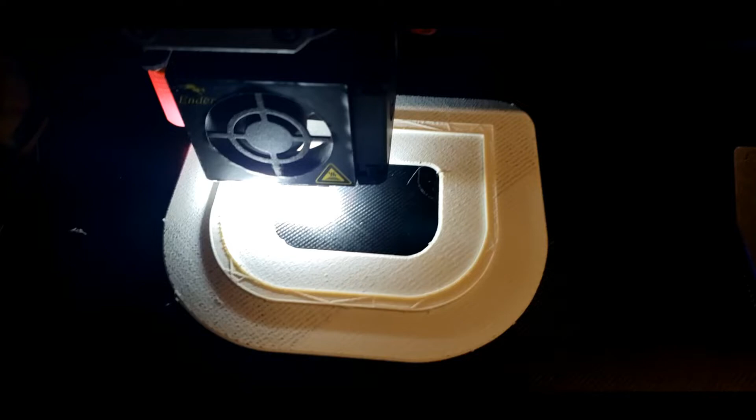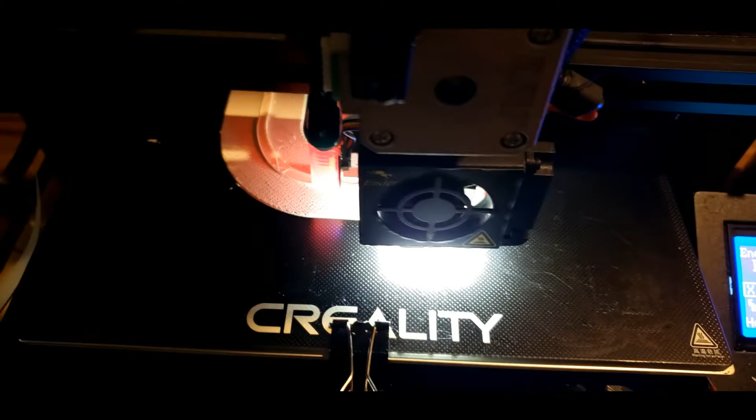Well, I have no idea if I'm doing this correctly. The raft is what I suspected, just underneath what it needs to be, but boy, this is printing like a quarter of an inch wide, which I think would be great for gluing stuff together.

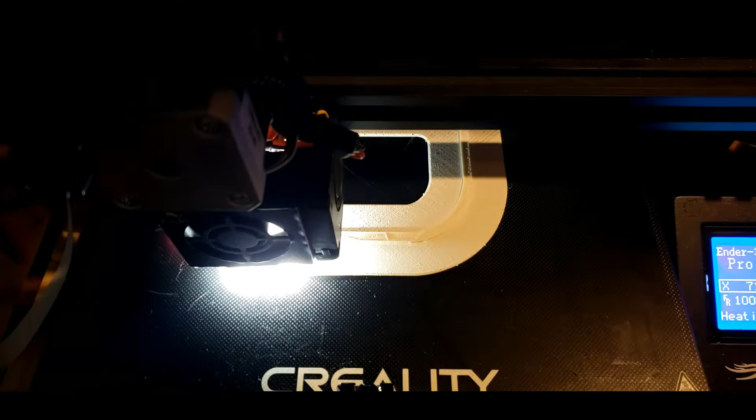But how would it print in a different orientation? Am I even doing this right at all? Well, this has just gotten started, so I won't know a single thing for hours. I'm going to go about my other stuff, leave it alone, and see what it creates.

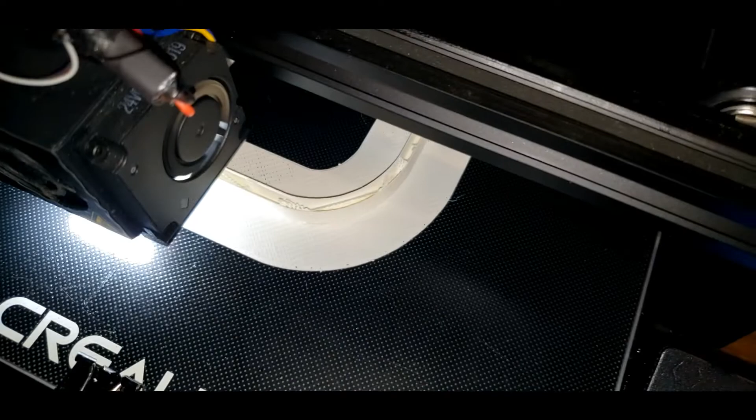Boy, that infill's getting awful deep. I'm getting worried that I'm not building it in the proper orientation, and I'm just going to have an unusable piece. It's just like walls or something.

I may try to print it in another orientation and see what I produce. And then I'm sure I'll be asking the designer questions and have something to show them that illustrates what's going on. This is just my first attempt.

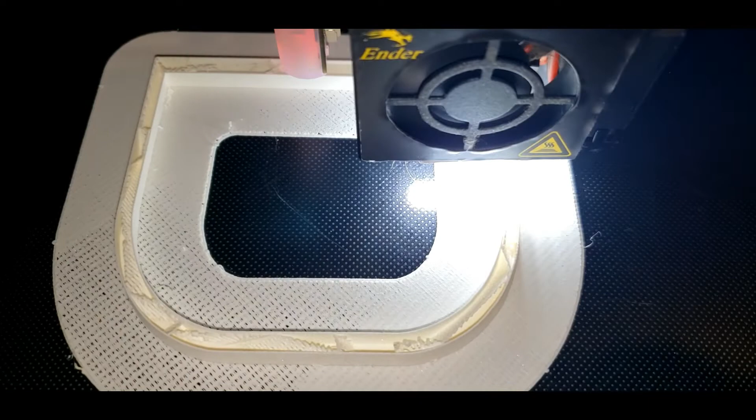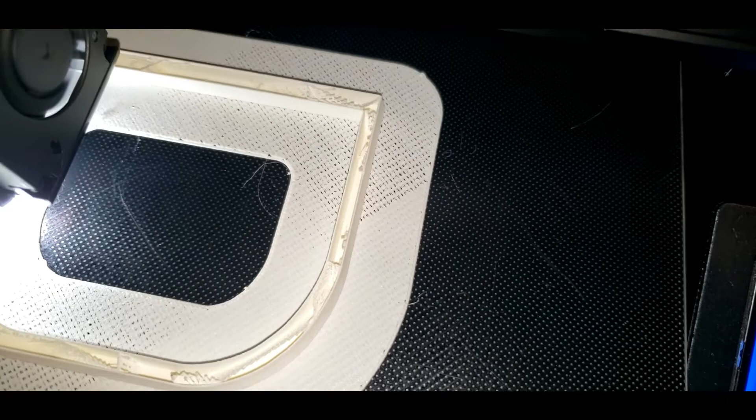So, like I say, I'm a little worried. It's like it's going to be hollow. Maybe everything's supposed to be built in the orientation that it is when you download them. I don't know. I'm just getting worried. I'll shut up.

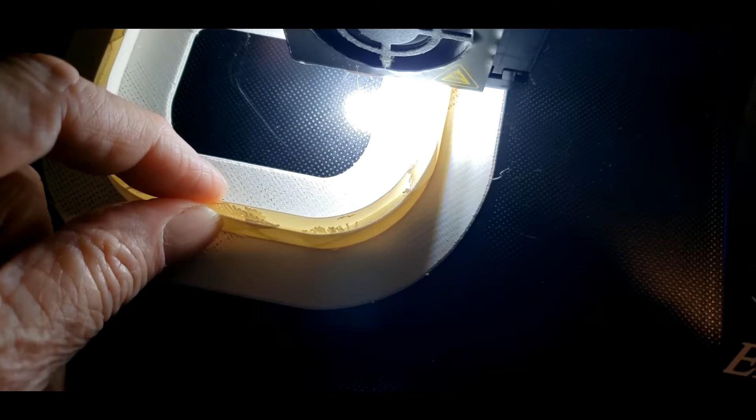It's the strangest filament I've seen yet. It's like paper. Of course, I'm printing it single wall, that's the infill in the middle. But this filament is like paper. It's unbelievable. I don't know how deep the hole is going to get between those two walls.

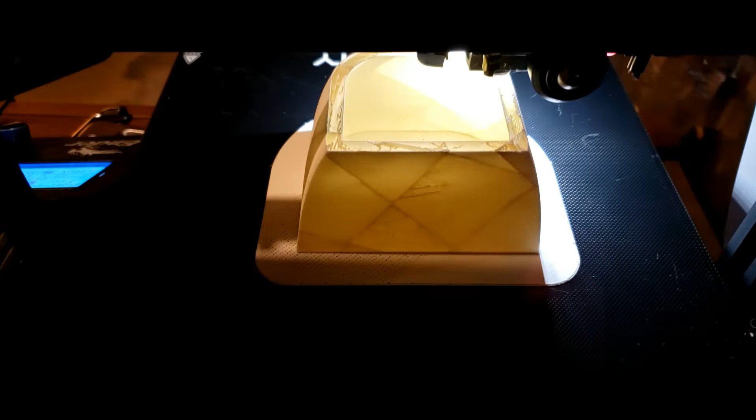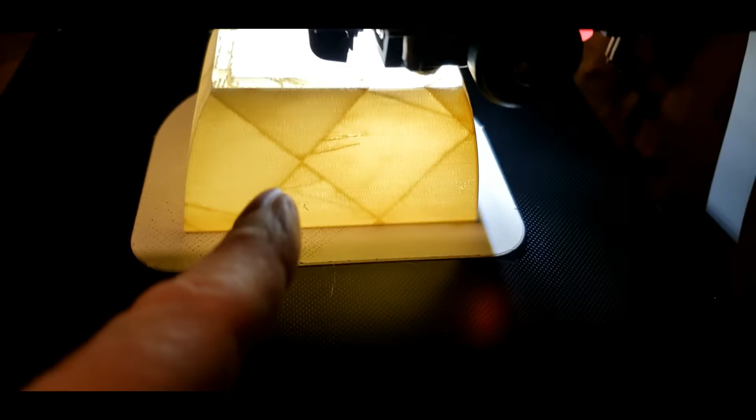Can't take a good picture of it either. It's still printing. It might not finish before I go to bed, but in my opinion, when it's going to try—I looked at Cura, and it's going to try to come up, and as the kind of dome here closes...

It's going to try to print a dome and then print this infill across it and then come back over the top of it with another dome. I'll try to show that in Cura tomorrow. I don't think it's going to successfully do that without support, but I don't know that for sure. It's all theory at this point for me.

So I'm going to try to let it print and see when it fails. I just don't want to have a failed print after I go to bed. These printers can catch on fire. So, really interesting though.

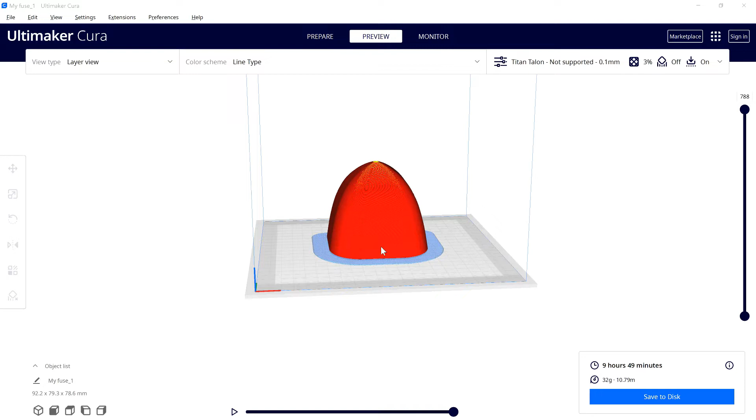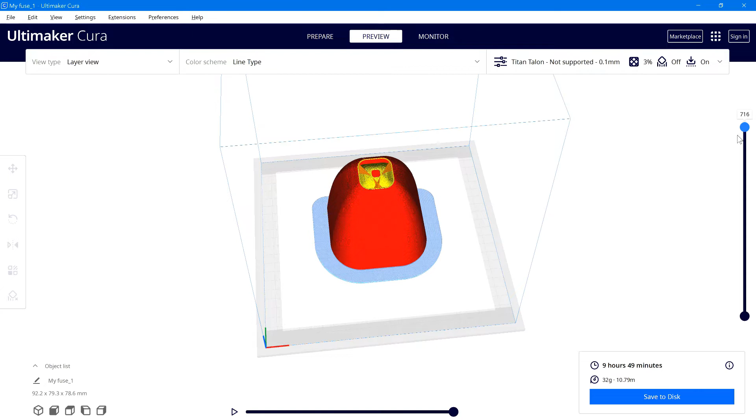And this is what I'm talking about on that print as it comes up to the point here. Let's pull down some layers. You can see right there as the top layer, which is one dome, comes apart, you're actually going to start seeing infill. The yellow lines are infill, and right there starts that little red part right in the middle — that starts the dome that's below that infill on the inside coming apart, opening up.

See, now it would be a hole. I don't think I can rack up that much. Yep, see, now it's a hole, but you can see infill here and here that supports the second dome. Once this one closes — and my worry is about this one closing at the moment.

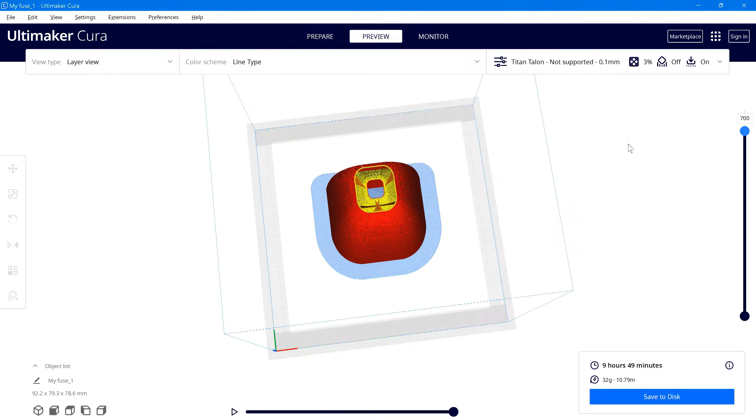See if I come up one layer at a time. You can see that right there. That's what I'm worried about. And that obviously is a hole, but then the next layer decks over it. So that's what I'm worrying about.

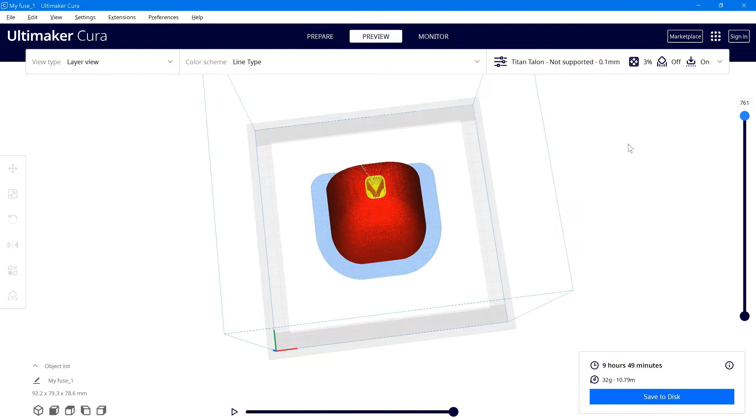And then it comes on up. The infill — see, that infill on that inner dome will support that second dome that's closing right now. So that's what I was worried about.

Now then, on this particular model we're looking at, I have all the perimeters set the way I think they should be: one wall. The infill is using that cubic subdivision at 3%. It didn't tell me anything about what this should be set to, but I left it at the default.

Let's see, the material is 200 and 60 on the bed. Speed, again, I chose 40 just to slow it down a little bit. I want it to print well. Cooling is 100% on.

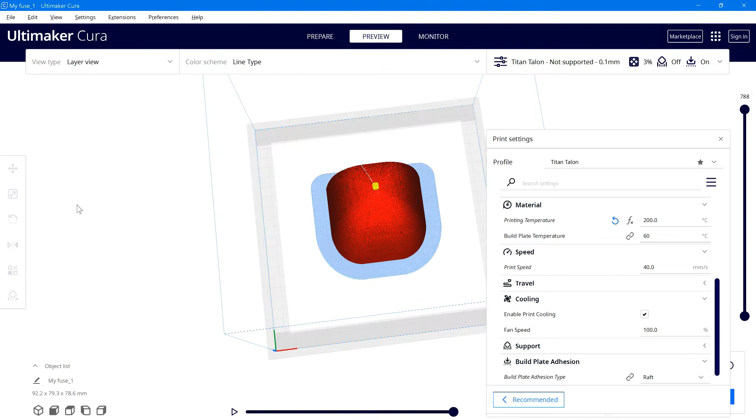And I am printing it on a raft simply because I want to have all the first few layer problems out. So that's the way this is, and I will print this one this way. But now let's just take a little bit of a look at that infill with that cubic subdivision.

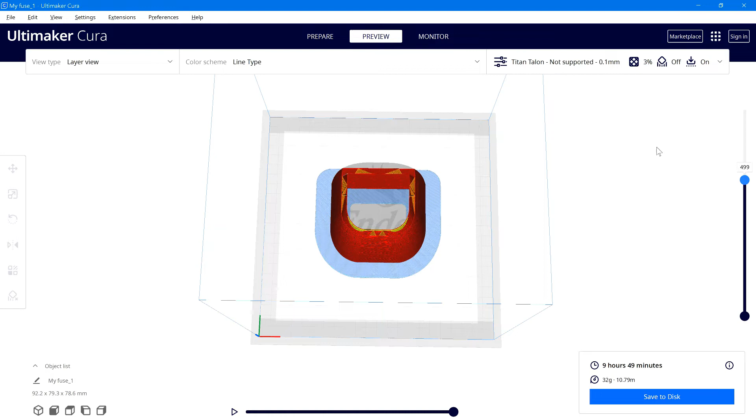I can't tell that much about it as I scroll down through it. It looks somewhat like the other, but I'm going to use what I'm told to use. You can't start troubleshooting until you have attempted to build it exactly like the maker tells you to.

If there's a failure, then you have to decide, was it my failure? Was I unable to follow their instructions? Once you have those decisions made, then you can start deciding, well, maybe if I did this, I can make it better. I think that comes kind of further down the line.

Oh, by the way, it looks like the new Cura does. Here's the raft, and here's that hole in the center of that raft that just kind of got me by surprise the other day. And we've got 1, 2, 3. Wow. And that does come in kind of funky like that on that raft.

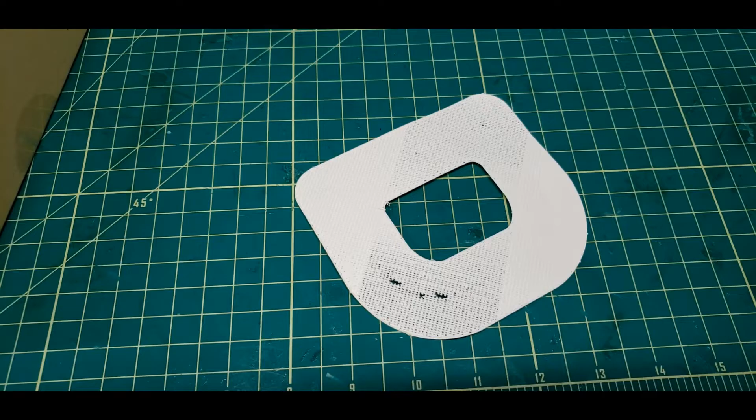If this is the only thing, or this colored here is the only thing they're printing at this level. Wow, see what I mean? Right down through there and right down through there are those 3 divisions that are somewhat different.

These problems here are when I took the build off this raft, some of the plastic broke. But you can actually see, I wondered what was going on when I saw this when it was building the raft. But it's right there in Cura. Oh man, weird.

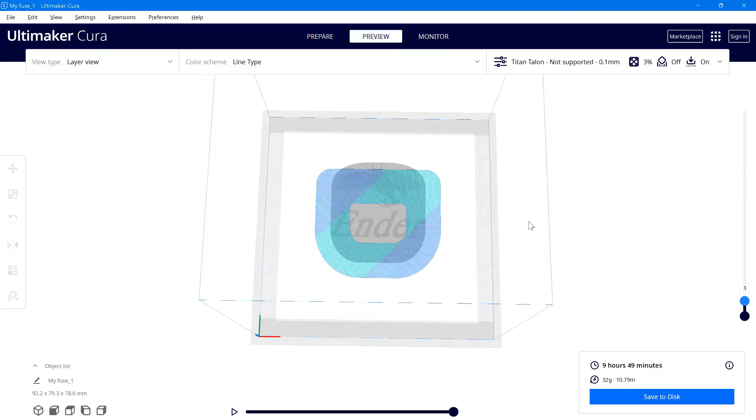And there's 4, so we got 4 layers for the raft, yeah, 4 layers for the raft to get out some imperfections, and then the 5th layer starts the print itself. And that print does print like that solid for 1, looks like 2, 3, 4, 5, 6. I think that's what I've got, yep, 6 layers for the bottom is what I've got set.

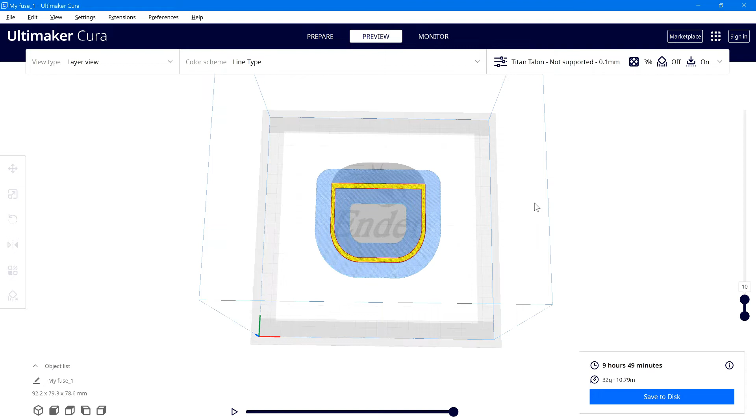That would be top bottom here. That's the defaults, so your bottom layers is 6 for 0.6 millimeters. That seems to be coming out well, and that is the default. And then on the next layer up, which is number 11 technically, you can see the infill starts.

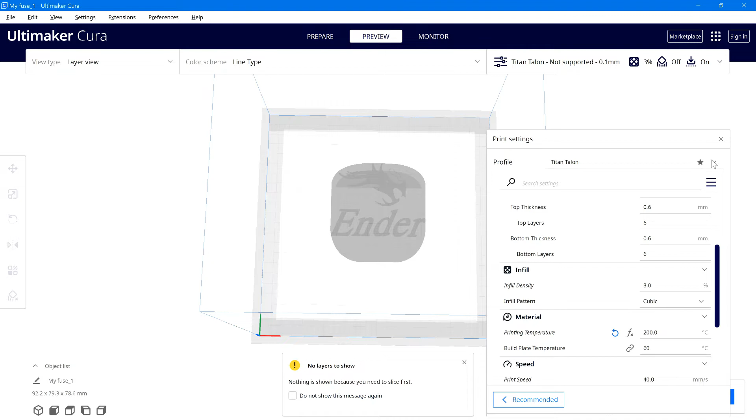Let me look at that infill. If I go in and change this cubic subdivision to just straight cubic, which I had it on the other print, I was hoping it was just going to change what I saw, but it's not. I would have to reslice it and everything, and get back up to layer 11. And by the time all that happens, I can't remember where those marks were.

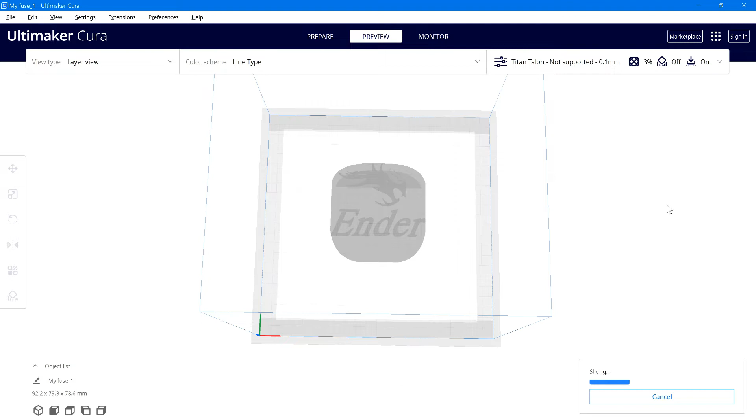Oh, I guess it did stay where I had it. So those infills right there do look different. Layer 13 looks different than these infill marks. And I think, yep, 13, yep, they do look different.

Yeah, so I'm going to print it again today. It's going to take about 10 hours, and I think that will be my final printing. I will set that aside and continue printing other things.

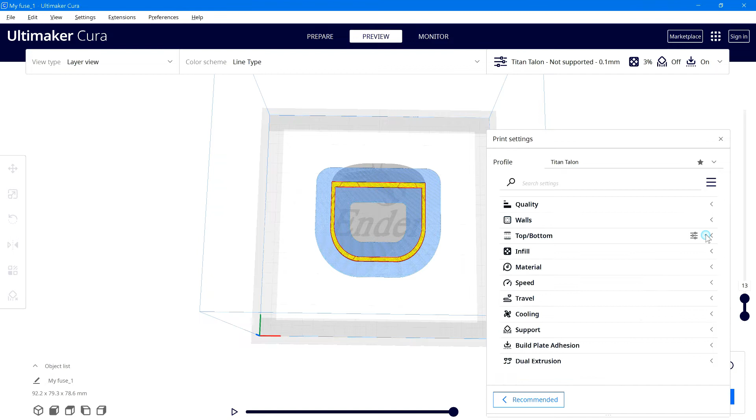I'm really having fun with this, and I'm also learning more about Cura. That's usually the way I learn. I don't sit down and learn something just for kicks and grins usually. I usually learn it on the fly, on the run, whatever you want to call it, while I'm doing a project. Yeah, probably would be a little easier on myself if I just sat down and did an overall Cura tutorial sometime. But really, the way I do things is I will leave one project with what Cura knowledge I have and go into the next project and pick up maybe 2 or 3 other little things.

I've already had the printer 2 years. I already learned G-code and modifying G-code directly. I don't think that's hard for a programmer. After I got out of the Navy and did all that hardware and electronics work, I used my GI Bill when I went to college to become a programmer.

I did know assembly language and stuff like that because you have to program machine language, whatever you want to call it. I call it assembly or machine language. You have to when you design a computer circuit. You're the one that designs that repertoire technically at first, and you have to work in machine language on those circuits.

You can't work in any language above that, really. Nowadays you can, but back then you didn't. So I had the hardest programming language on the face of the planet, which was machine language or a repertoire of instructions for a processor chip, down before I got out of the Navy.

When I went to college, I took Fortran, COBOL. Those were the only programming languages when I was in college. C++, HTML was 20, 30 years away, Perl and all that. But I learned BASIC on my own playing with a Radio Shack tabletop computer.

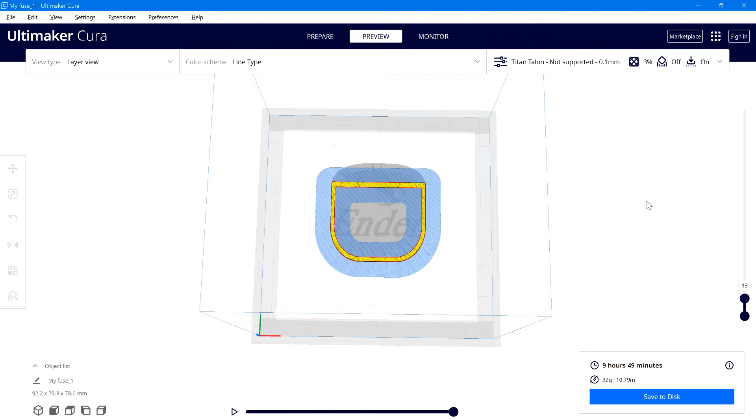All right, let's move along here. And my little printer seems to be printing it pretty darn well.

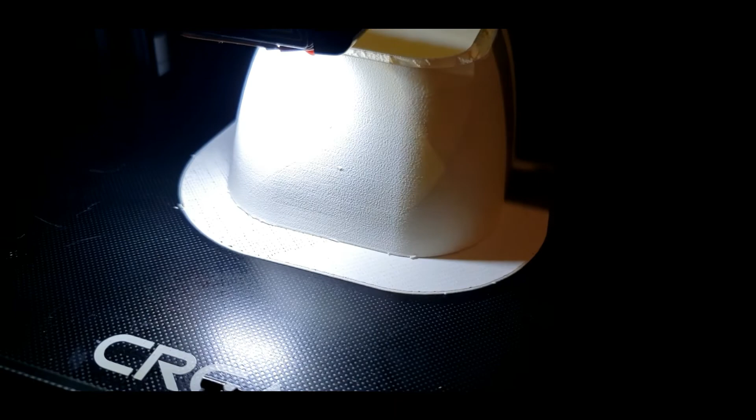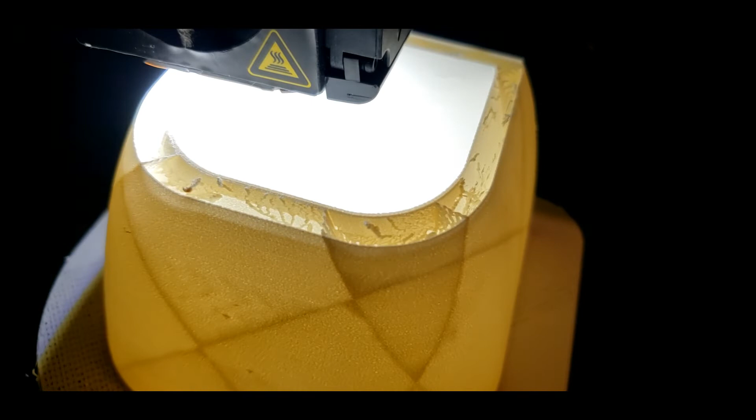Just such a unique thing to print. The head keeps getting in the way. So don't go to bed for a couple of hours.

Well, it just keeps getting smaller and smaller on that inner dome. I just can't believe the last little bit of that is flat. It can't just float in midair. We'll see what happens here. Crazy, it's supposed to print for 3 more hours.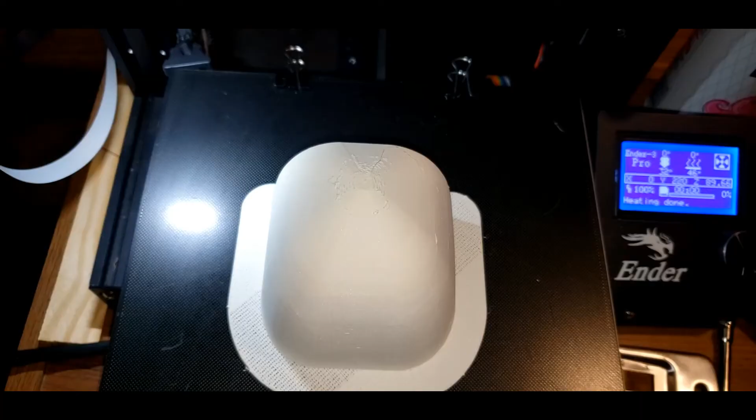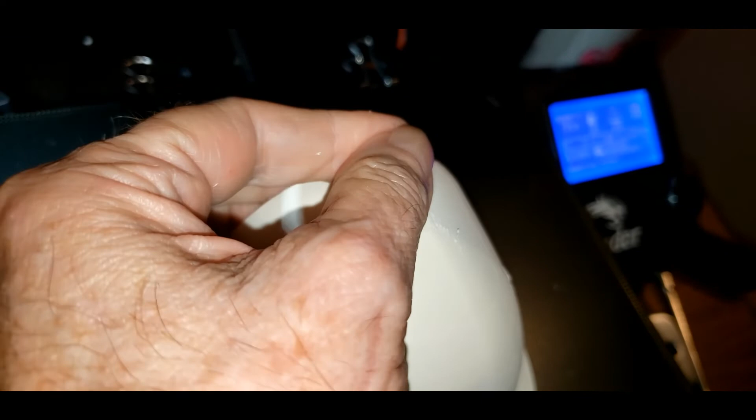Well, it's sort of printed. Got some roughness up here. Not quite sure what it is. Have to get it over in the light. But overall, I would say that's pretty darn good. Don't know if this can be sanded.

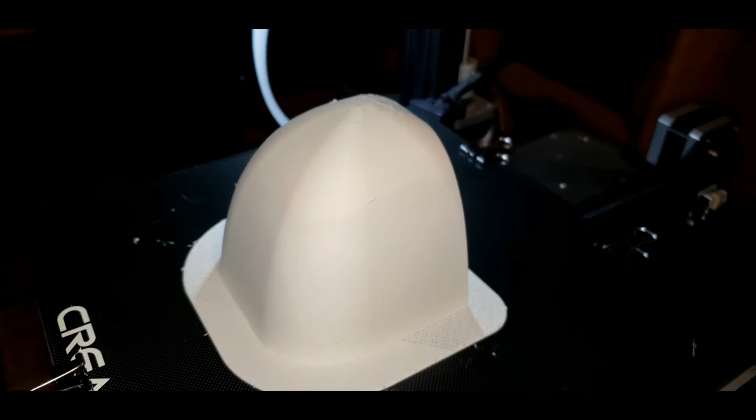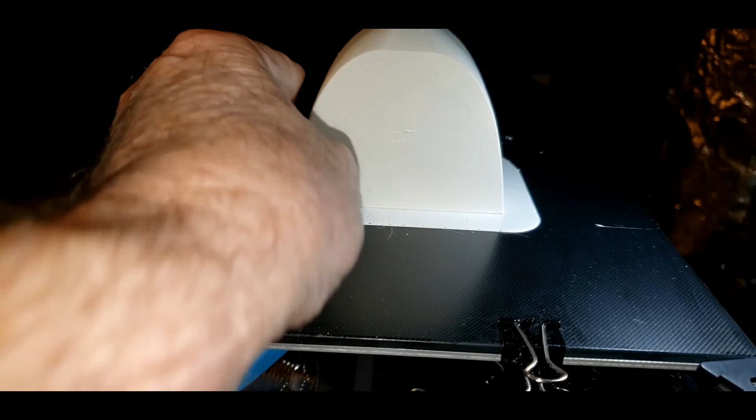It is the top of a mini Talon. Oops. Boy, that feels pretty solid.

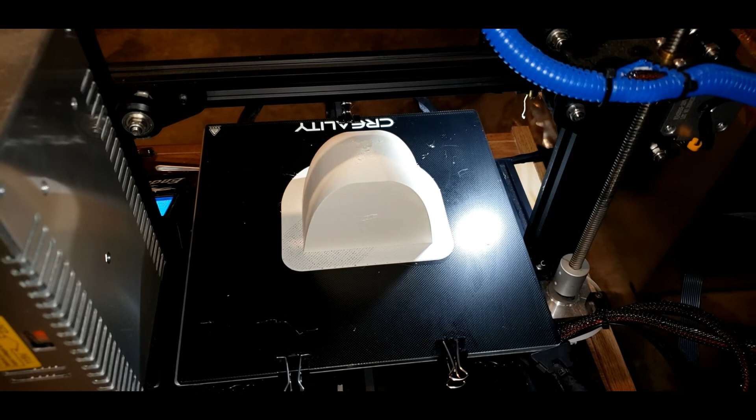I'm going to let it cool a bit more. It'll come off the build surface much easier. I'll probably do something with it tomorrow.

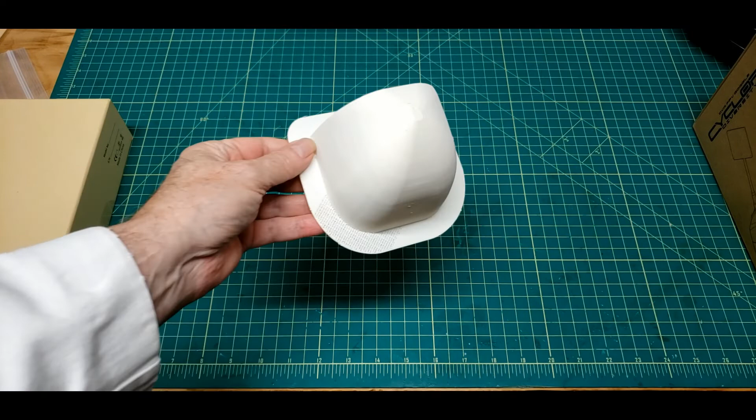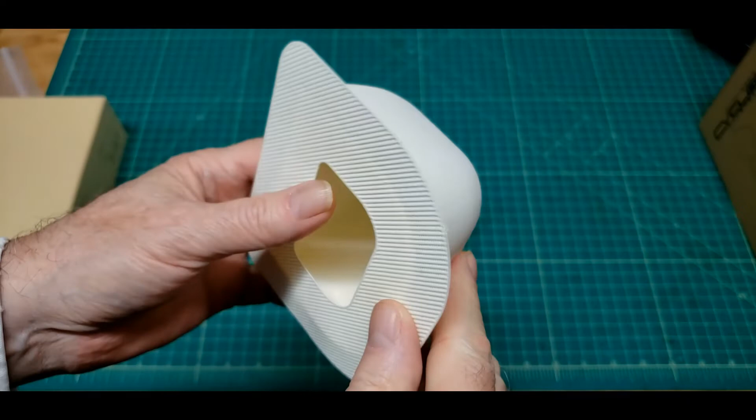Well, it finished printing last night. I haven't taken the raft off of it yet. It's pretty unusual, it did complete without failing. It's amazing, and it feels like paper.

It's wild. Like I say, I saw Josh Bixler show this filament PLA months ago. I just never had an opportunity to test it. So we'll take the raft off now.

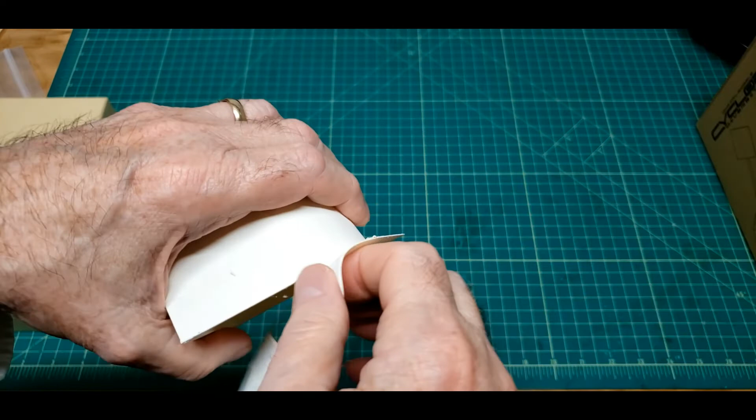Wow. Oops. Doesn't want to come loose there. A little cleanup to do right there. Not much, we'll do that later.

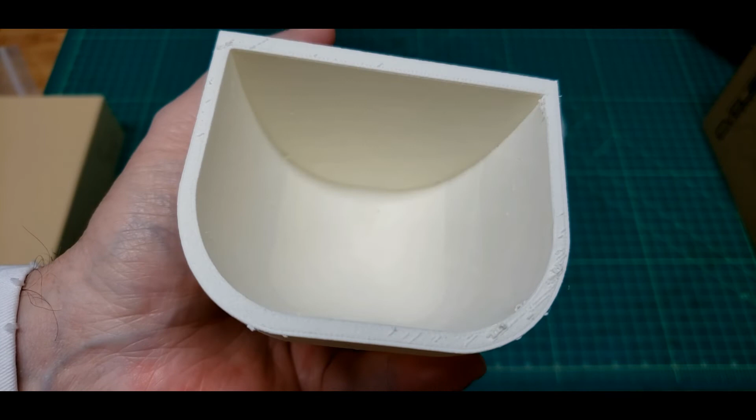And as you can see down in there, the center part did not fail either. It printed, I can't believe it. And it looks like this. I've got a nice surface right here to glue to, except for the fact that I printed it with the wrong infill.

It's double walled with infill between it. And it is kind of, you know, it's not as strong as foam, I guess. We'll see how the one with the other infill works out.

Now this up here, you can see a little bit of color difference right here. There must be something different going on inside. As it gets up to this dome, it is really strong. So we'll see how the rest of this works out later. I am super impressed with it.

Also, my little printer, there's a little blemish there. One right there. A little there. But overall, I think my printer did a really good job. I mess with that printer constantly, tuning it and setting it up.

I'm going to do a little cleanup work around the edges. I really do just want to crush this, and this is not... I started to say not a usable part, but I just don't yet understand how the infill works. And the fact that I had it set wrong, I think is on me that it was wrong. But the part does feel really, really good. So I sanded this face right here ever so lightly by hand, and it just cleaned up beautifully.